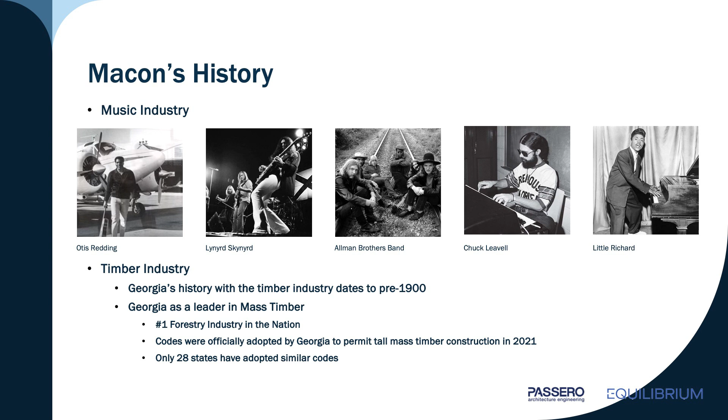Oh, before you switch over, though, I really want to point out the first picture of Otis Redding holding the guitar like the axe and leaving from his aircraft, and it's hard to see, but behind him is the World War II hangars that create the framework for the FBO.

As the mayor was saying, the most important thing about the airport is it is a gateway. It is the first thing you see, especially from passengers coming in from the air. But it's also very important to the community, so the challenge is to make sure that that gateway also has this thing for the community. From when you enter it as passengers, you see it as a guitar because you are up in the air. But then the experience on the ground is you kind of get the inkling of what it is. You can't tell right away, but you get the other expression of the piano keys that we have on the facade.

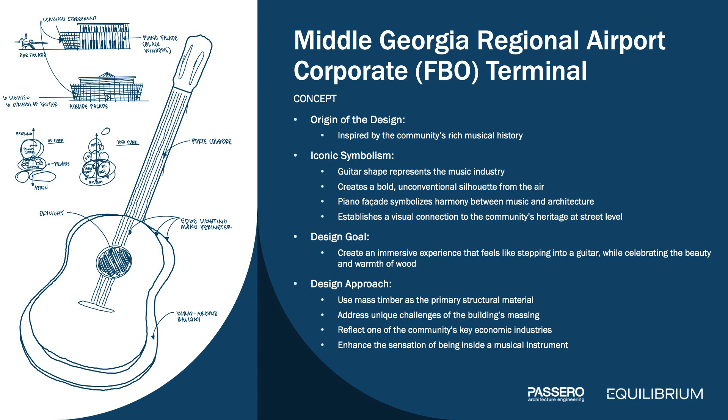Once you get there, the other experience is when you really enter the building, and that's where it's very important that we selected wood. Wood gives that warmth, and as was mentioned earlier, you also get smells. That also is very good. So you get that full experience. So it was really not hard to think that mass timber was absolutely the quintessential structural component that we needed to make this work. Also, as you enter, you think of a wood guitar, but also what's essential is with timber, the complexities of what we're doing and how we're doing it, and the flexibility of that is just incredible, hands down.

So another big element too, as we design the site, is the security. What's very important is security at airports. You have your private security area for your passengers, but also you have the community. So the way we designed it is that you have your security area, but as you approach the building as a two-story element, it allows the people from the community to go into the building, experience the building, go up to the second level where they can look out over the security area and experience the airport and not have to go through any security to do so. What's also beautiful is that we also have that balcony where you can look down on an event space that we created on one side of the building, while we put the back of house on the other side and access to the apron areas.

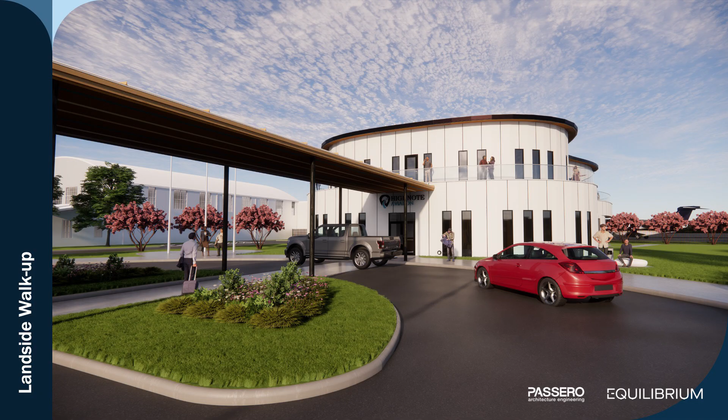Also, what's beautiful about it is when you are driving up from the community, you have an inkling of the guitar. You don't see it all because it's nestled in with the hangars, but you do get the neck coming out as you approach it. And what's very dynamic about the neck, and then hands down, is that it's CLT. The neck and the head is solid wood through and through.

Also, what's great is with the flexibility of the wood, we actually created panelization that gives us the curvature. And we use that with segments of 4 feet, works with plywood, and it works everything with the windows to create the positive negative space and the piano keys.

The experience on the other side is more abstract as you come up on an aircraft, because you already know it's a guitar if you had the chance of glimpsing out and seeing it from up above. But we were able to create a more dynamic effect on the outside because as you approach it, you actually see the essence of the guitar strings within the curtain wall of the building. And you start to see the structure through that. And you get that beautiful LED lighting of the 6 strings.

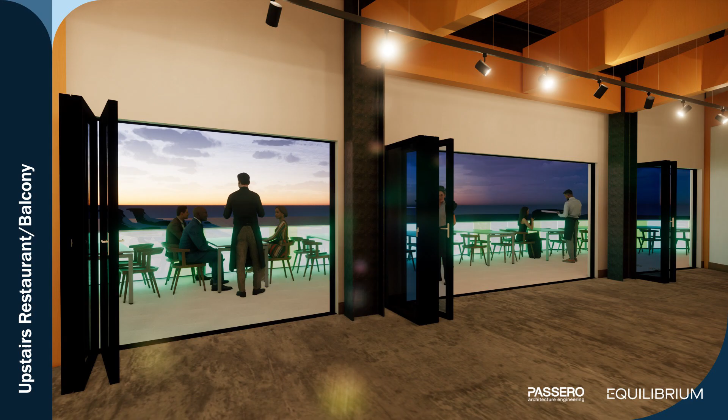As you go through the portal, you then really get to experience the building and its structure. And you get to see how we do the radial columns in form of a cobweb to work with the curvature of the guitar. You also have the LED lighting. The LED lighting on the ground is synced with music and colors, and also is tied into the entertainment space. So if you have a band playing underneath the tent, it will run your building. From the air, though, you only see the white lights of the guitar on the top.

This is a view from the restaurant, which also you would have a view from the conference center, or the conference room next to it, where you then have the blend of the building and the excitement of the airfield. Look out on the field, the planes, you get that connection between aviation and then also music. And what's beautiful, you can see different colors. Any event, St. Patty's, the Blooming Festival, you can color for anything you want.

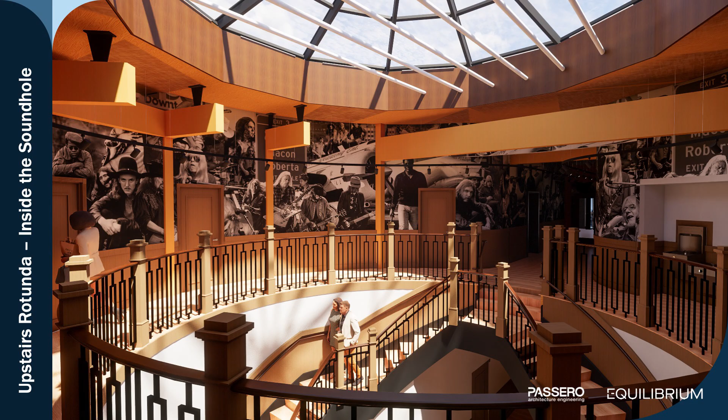But this is what speaks all about it, and where hands down the guitar was by far, because you have the sound hole. It creates a perfect rotunda for circulation to get up to the 2nd level. It creates a very dynamic space. You have a 24-foot diameter hole. You got the strings of LED lighting running through. And then you also, once again, get the expression of the beams and the radial pattern that works beautifully with the building.

Yeah, and some things I want to point out on this slide too are getting down to the details. We really push the narrative forward to the next level by incorporating details and nods to music, all the way down to the spacers on top of the beams that emulate guitar picks. And then we have this beautiful mural, and the design intent for that is to highlight the local artists that are from Macon. And even the railing looks like piano keys if you look closely.

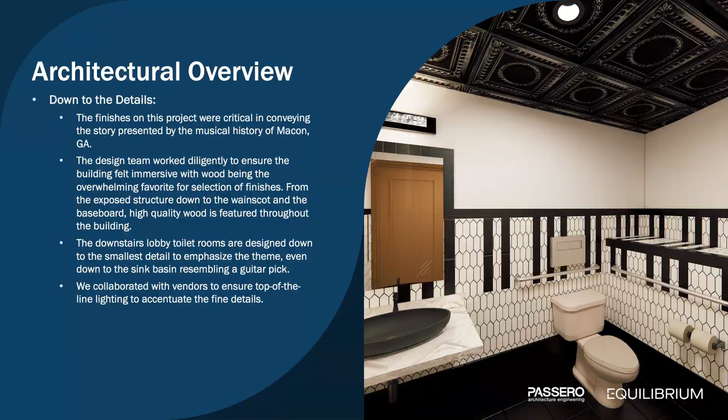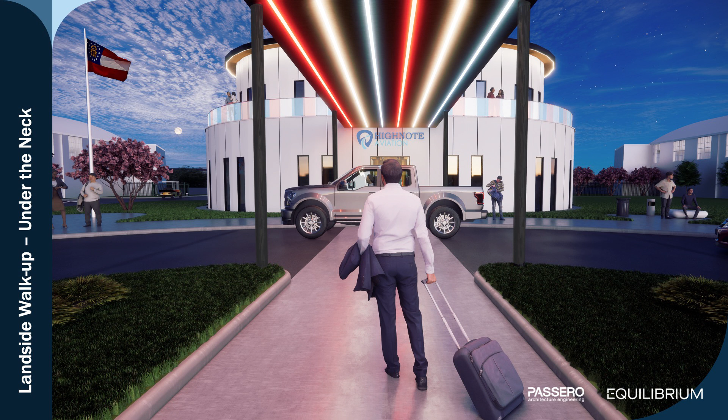This is as you walk into the building. So this is the first thing that you're met with. And it's kind of like the whole back of house is behind you, and all that's in front of you is the public space and the airfield. This is another view looking at the LED lighting from the ground, and you can see the colors and how they change. This one obviously is for the 4th of July or any event like that. And then also another key thing that was crucial was lining up the piano keys and their spacing to make it look like a piano. So that was a challenge, incorporating the interior layout with the facade.

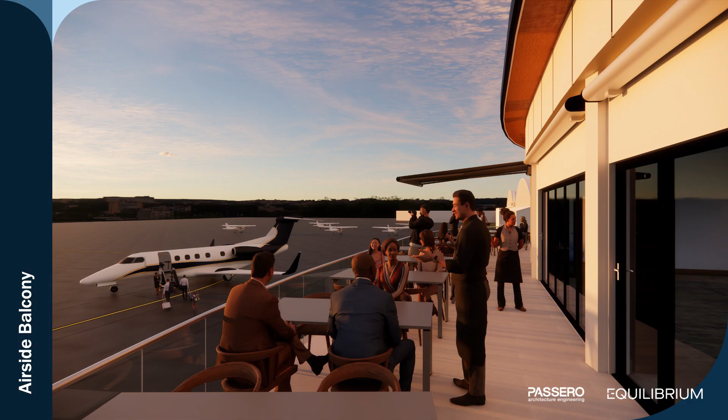And then finally, I want to touch on the airside balcony again, because we did want to make this space usable for the public year round. We incorporated retractable awnings so you can use it regardless of the weather or heat. Now I'll pass it over to Matt for some structural.

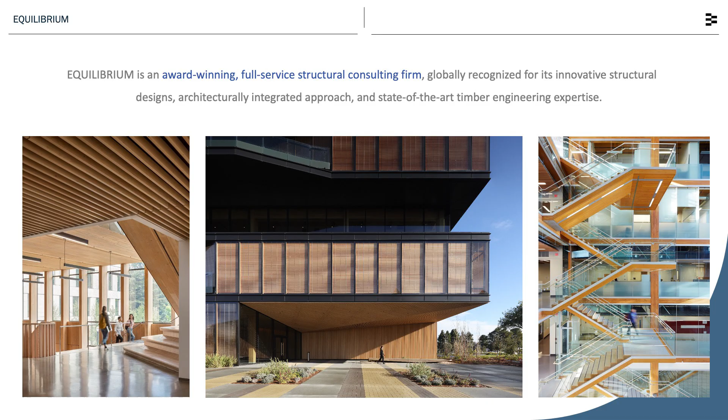Brief introduction to me and the company I work for. We're called Equilibrium. We're a structural engineering firm. We've had a focus on timber for over 25 years now, and have done a number of somewhat noteworthy projects in mass timber across the US, Canada, and further abroad.

We've done over 100 mass timber projects at this point. I think my personal count is somewhere up in the 20s now, and most of those are, actually it's a mix. It's all over the country, to be honest. It's cool to start doing some projects a bit closer to home in the last couple of years. We're based in Vancouver, BC. That's where most of the team is.

I lead our company in the US, and so we have an office of 4 now in Atlanta, which represents 300% growth in the last couple of years. Similar story in Paris. We have 3 people in Paris as well. Small but growing team there.

Not all of these projects are timber, but I think all but 2 maybe are on this slide, but this is just kind of representative of the work that we do at Equilibrium. And I think maybe the primary takeaway here is we're not pigeonholed into one thing. We do projects of all scales. Timber is certainly a common theme in our projects, and most of these are timber projects, but trying to always use materials in creative ways and in the ways that they work best, right? And we're certainly partial to mass timber.

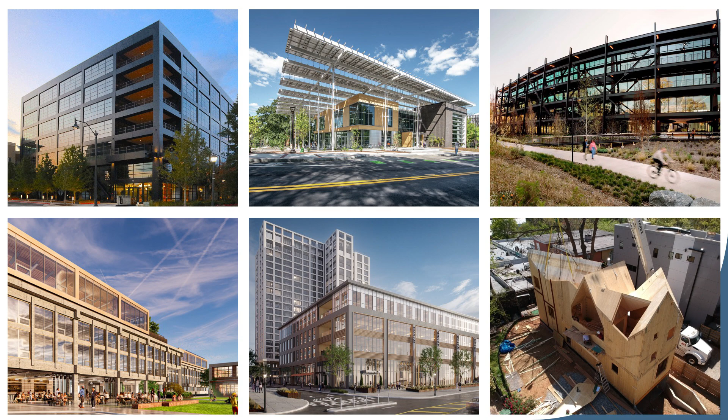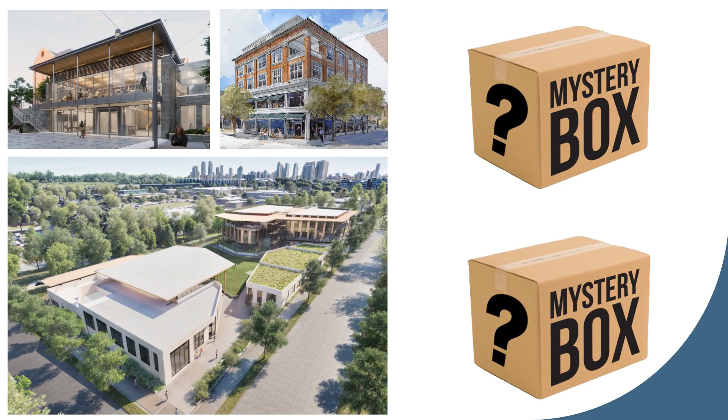I'm going to blitz through this really quick because this has been talked about by everyone so far, but mass timber in Georgia, you guys have seen these projects. There's a number of good precedents in Georgia, and it's great to see one now coming up in Macon. Those are projects that are built. In terms of projects that are on the go, I think we are still ramping up what we're doing here in the Southeast and in Georgia with more and more timber projects.

So these are some projects that Equilibrium has on the boards right now within Georgia. So this is just our firm. Certainly there's many more projects that I'm not aware of that are being planned, being designed right now in Georgia. But doing a little connector building between 2 existing residence halls at Georgia Tech, the Smith and Howell dorms. That'll be a timber building.

A boutique office. Yeah, that is it. There you go. That is your Georgia University one. There is also one, the Kendeda building at Georgia Tech, right?

Doing a project, a boutique office building in South Downtown Atlanta. A small campus for a nonprofit in the west side of Atlanta. It's about 80,000 square feet in total, full mass timber. It has a 3-story office building and then a 1-story training community center and a 1-story kind of mixed use and assembly space. The 2 biggest and perhaps most exciting projects I can't really tell you much about, but suffice to say that there's a couple potentially really significant projects coming in Atlanta.

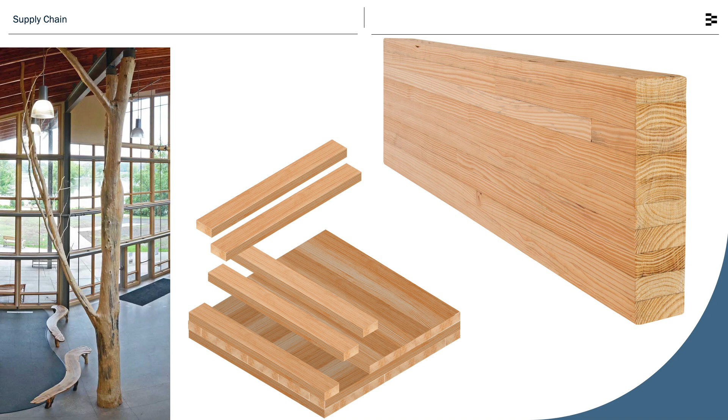So back onto the FBO. I think this is actually the same graphic I saw earlier, maybe in Matt's presentation. So I won't rehash that, but the project uses 3 different types of mass timber. It uses glulam, it uses CLT, and it uses what you might just call trees. Some people call it SRT, structural round timber. A lot of names for it, but logs, trees.

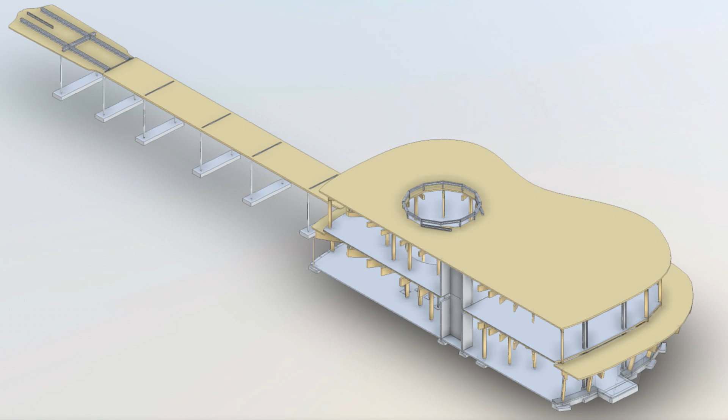This is a little cutaway view of our structural model for the project, our Revit model. And as you can see, it's mostly timber. There are a couple non-timber elements. We have CMU block walls in the middle that provide much of the lateral stability for the building. We have a couple of steel moment frames at the end to keep the building from twisting too much, since those core walls are pretty tight in the center of the building. And then there's a bit of miscellaneous steel framing at the guitar neck and head.

So focusing a bit more on that, again, you can see we have small steel moment frames holding up the neck and a bit of steel overframing to support the head. We had a really long cantilever. I mean, we could have done it in all wood, but it was a good time to just use a bit of steel, throw it up on top of the CLT where you won't actually see it.

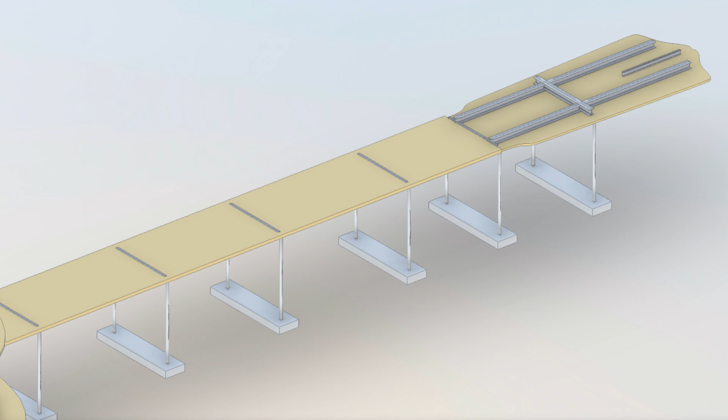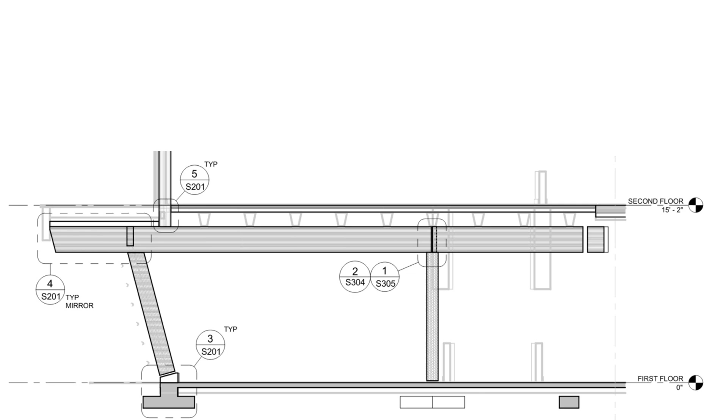The first is that in this section view, you can see we have the same glulam beam running from that wraparound balcony that goes around the whole outside back to the inside of the space. You always need a drop in your structure when you're going from inside to out for waterproofing reasons. This project, like many others, will use a pedestal and paver system, and underneath that you have your waterproofing and your sloping to shed water off the balcony. So we needed a step of at least, call it 8 or 10 inches for that.

But because we were doing that, we figured we'd take the opportunity to drop just a little bit further and then allow a big enough gap for services, including ductwork, to run through, which makes it such that you now will see those glulam beams unimpeded by your building services running through the space.

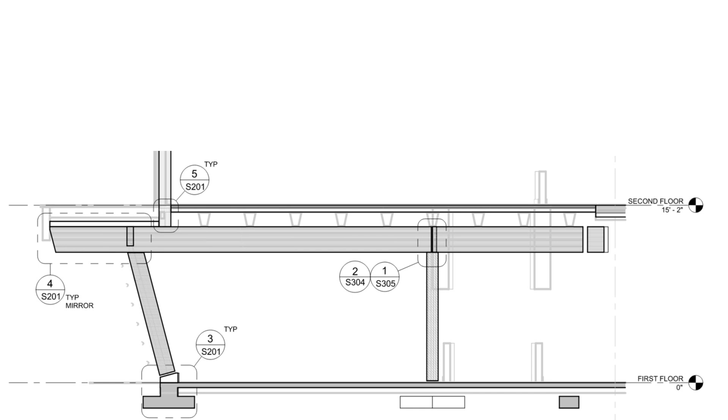And this is one of the things about a mass timber building. Everyone thinks about showing off this beautiful mass timber structure, but you're also showing off all the other stuff that's usually on the ceiling, right? That you don't normally see. All the stuff that's above these tiles right now that we're not thinking about, but they're there. So finding good ways to integrate those systems into a building is really important. And this is one of the strategies that we took on this building.

So we have these spacer connectors that go between the glulam and CLT. We're making those out of, it's actually an S section, similar to a wide flange shape in steel. And in order to minimize waste, we're cutting them in this pattern out of a steel beam. Again, it's kind of a bit of a nod to a guitar pick. At one point, we had ones that really looked like guitar picks, but those got VE'd out.

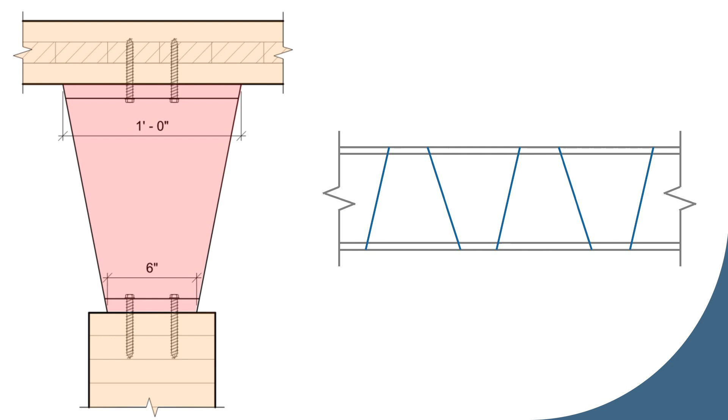You know, there's some people here who can fundraise, so if you can find another 100 grand, we can get those back.

Pivoting a bit to talk about the timber supply for this project and the story that's somewhat uniquely a Georgia, Macon story here. So first, someone else already went through this, I think, but the actual process of producing CLT, producing mass timber, of course, starts at the forest, goes to the mill, goes to the CLT plant, and ends up on the job site. There was always a desire to use regional southern pine on this project from the beginning, and preferably sourced from Georgia forests.

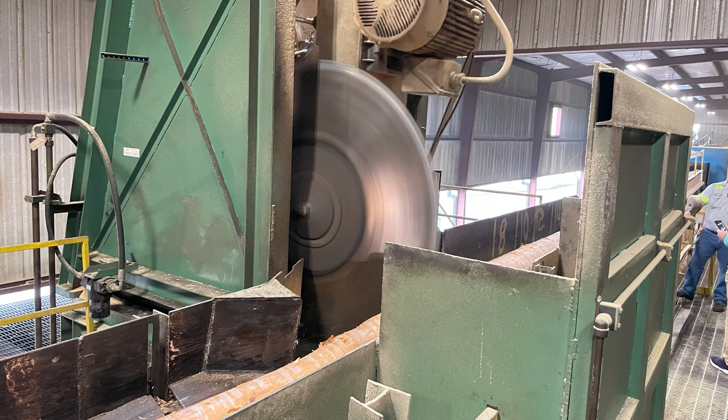From those forests, of course, we're going to the mill. I'm sure many people here have been to a sawmill before. If you haven't, check one out. They're insane. Just these huge, massive facilities with unbelievable throughput. Super, super automated these days. But anyway, what comes out of there, of course, is lumber. And at this step, it hasn't made it to the kiln yet, but the last thing is going to the kiln and getting dried out.

Most lumber is dried to 19% or less. Usually it comes just under 19%. You don't want to dry it more than you necessarily have to. For CLT, cross-laminated timber, you have to have your moisture content below 15%. And so there is a little bit of extra work that has to be done at the mill or post-processing from the mill to get those boards to where they can be used.

This project is being supplied by SmartLam. SmartLam is owned by sawmills, and so they kind of have this sorted out, where they can automatically sort CLT grade lumber, which has been dried enough, from their facilities. And just to give you a sense of the scale of mass timber right now relative to the scale of the lumber industry, it's nothing.

SmartLam, again, like I said, owned by sawmills. Those sawmills send less than 1% of their lumber to SmartLam, and that supplies all of SmartLam's mass timber operations. So a lot of room to grow within the industry for sure.

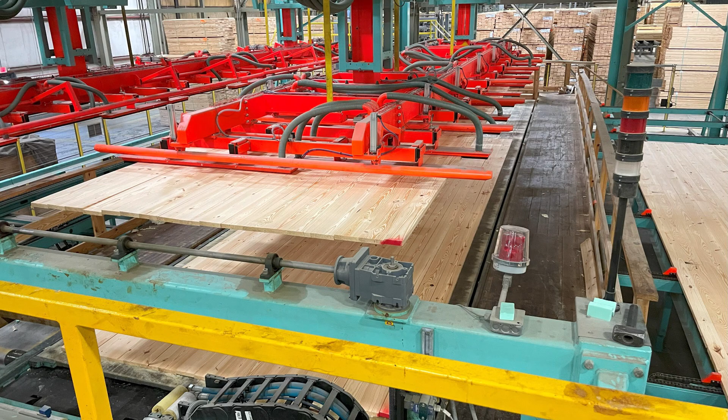Anyway, from the mill, these boards then go to the facility. This is a shot from SmartLam's facility in Dothan, and you can see a layer being dropped on here to make a CLT panel. They have a press that can go up to 11'1" by 51'4", I think. So really big panels are possible here. We will be using quite a bit smaller ones due to the weird geometry that we have on the FBO project.

When we were designing this project, because we knew we wanted regional supply, there were basically two options. It was Mercer in Conway, Arkansas, and SmartLam, who ended up getting it in Dothan. And as Seth mentioned, this is not a commoditized industry. Mass timber, different shapes, different sizes, different species, different layups, right? Which is the grades you're using and how you actually put them together to form CLT.

So one of the challenges with this, which was a hard bid project, and other things Seth mentioned, it's nice to have a contractor on board early. We didn't have that benefit. So one of the things we did was we basically designed for two different suppliers because we figured it'd be one of those two. And so all of the designs that we did with the CLT, we were checking each step along the way what was going to work for each one of these suppliers. We ended up doing two different layups, one geared towards SmartLam, one towards Mercer for virtually the whole building. SmartLam won, and so that's of course the one that will be used.

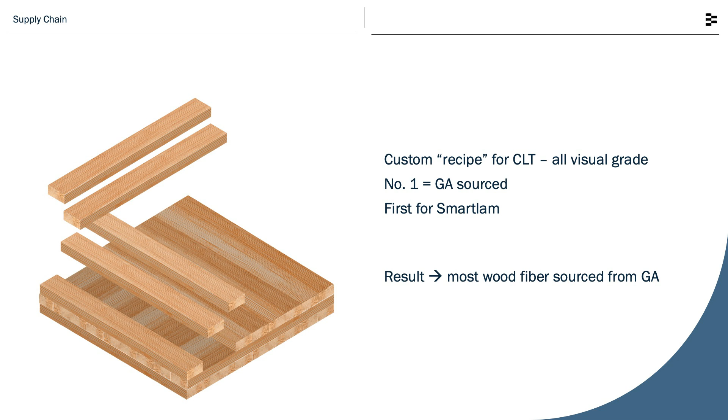But one other thing that we did was we created a custom, called a recipe for CLT. So rather than using one of the existing layups that SmartLam had, we knew that they'd be able to do something they hadn't necessarily done before. And the reason we did this was because we wanted to use as much Georgia-sourced wood as possible. And just the way that our supply chain is with SmartLam, they can source visually graded lumber from Georgia, but not mechanically graded. But we needed more strength than we could get from the visually graded product that they currently had.

So the solution we had was, instead of using that product, which uses number 2 lumber, we asked them to use number 1. And so they were able to source from Georgia. They have to get certified to produce that because they haven't produced that before, but they're willing to do that for the project, and they think it actually gives them a new offering that's kind of in the middle that will be good for them in the future. So this will be the first project using number 1 Southern Pine. It's also going to be all the CLT lam stock coming from Georgia, which was a big win. Turn it back over to you guys to wrap it up.

And what's nice, just to go on that, that means over 70% of the building is southern yellow pine. From Georgia, yes, which is very important. As the mayor said, demolition is already occurring. Thanks to Sheridan for doing their work. We're very excited about that. We have another project that is also going to be bid out, which will get the rest of the site clear. And we're very excited to be done on time as the mayor wants us to be. So we're committed to that, as he knows.

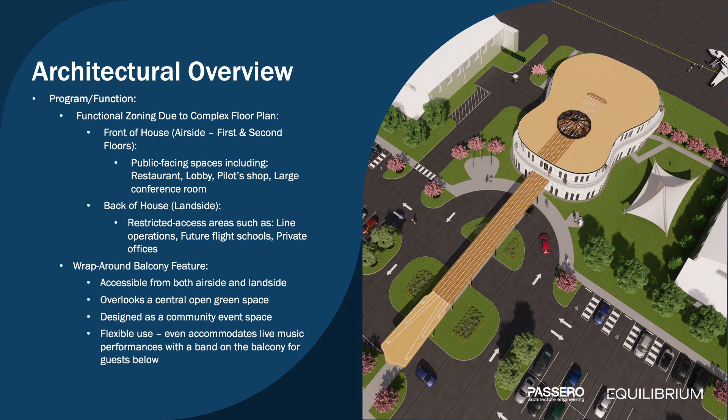So with that, thank you guys for giving me the opportunity to share those details with you, and I'm happy to answer any questions if you have any. All right.